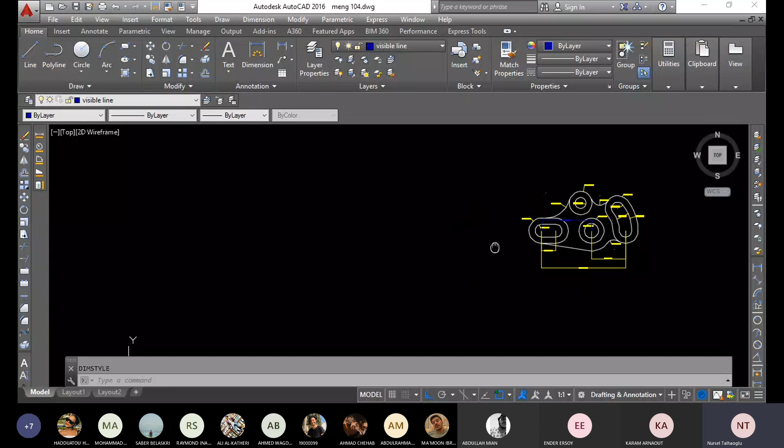So this homework is not graded, right? Not graded. Okay, can you see my screen?

Yes, very good. So first of all, my friends, please choose your command line. Write dimension style, or just DIM style, doesn't matter, and press enter.

Is this program easy for you? Do you have any problem about the program? Do you have any problem, my friends?

Not really. Good. Because after this week, generally we will do lots of examples, and I think you will enjoy these things. We will finish the topics. We have one or two basic topics, and then just exercises up to midterm.

So, did you open the Dimension Style Manager? Just write Dimension Style and press enter in your command line. When you press enter, automatically you will see a table.

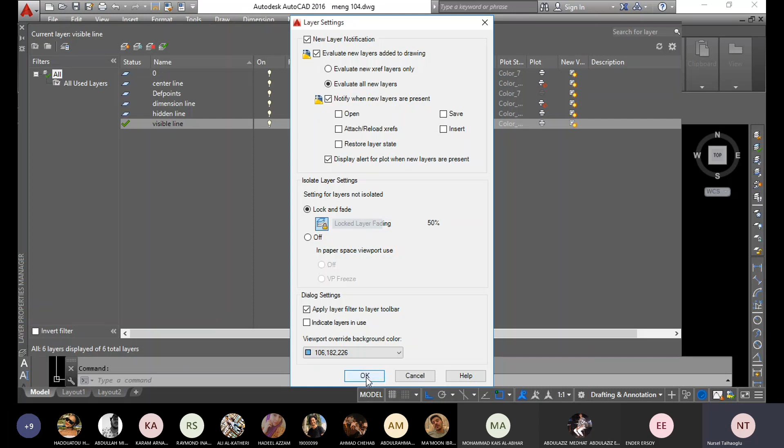This is difficult for you because... Okay, just do these things and press OK. And then please, can you create them again?

Maybe after the lecture, or no? Just a minute. Did you send me the photo? Yeah. Okay, let me check this one also.

Yes, teacher, I sent you the photo. Yes, I saw, just a minute. I will try it, it is related with the other things.

Just a minute. From your dimension style part, you have words: annotative, save, restore, status, variables, and apply. Did you see it? Yes, okay, right, dimension style.

Again, and on this point, okay, please select the apply part. I'm sorry, select what? You said annotative, no. Just a minute, enter the dimension style option, apply part, the last one.

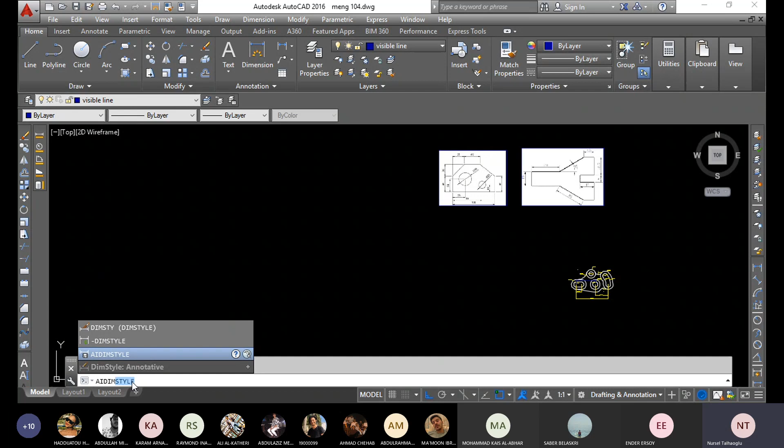Yeah, exactly, yes, I think you select this one, annotative. Yes. This is related, that's why. So just select dimension style and continue. Yes, now you have this window.

Teacher, yes, I have a question. How can you change your dimension units? Because, okay, this your... we will do it together now, okay?

Okay, my friends, can you open this window, all of you? Who opened it? Okay, very good, so let's continue.

First of all, I teach you the options, and our main option is modify, okay? So first of all, start with the lines, okay, with this button.

When you look at the dimension line, okay, you will see in the preview in the upper right corner. Can you see that? Yes, we can see that.

So when you set something, there are setting buttons at the top, okay? So when you set something, you will see the differences in this preview, okay? For example, from the suppresses part, I select dimension line. Okay, can you see the difference? Yes? So you can continue with the preview.

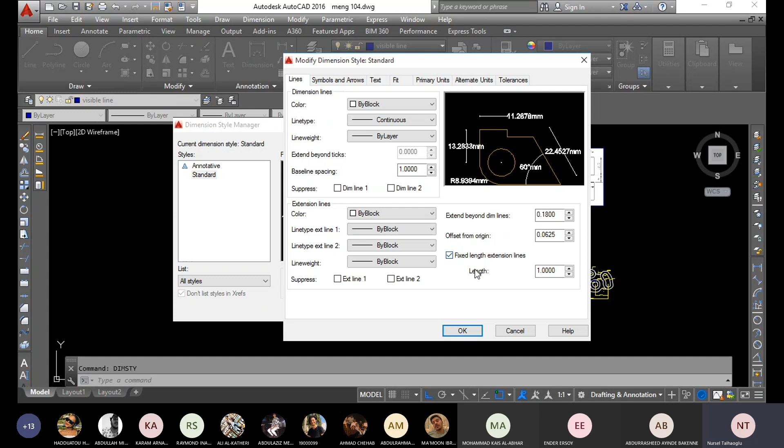Okay, did you finish this part? Fixed length extension lines, okay, can you see that? Oh, this is related with you, but generally I don't want to do this one because when you see them, okay, you can see the corners, okay? It's up to you, okay.

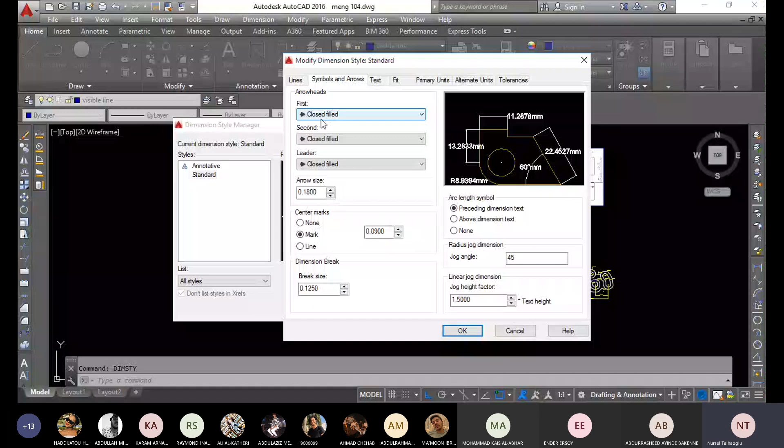Yes. Now, please move to symbols and arrows, okay? For the arrowheads, okay, generally we are using the closed filled arrow types, okay, arrowheads, I mean. So please select all these three, closed filled, okay?

Make your arrow size 5 millimeters, right? Okay, because the other one was too small. We want to see the arrow.

Okay, and for the center marks, select mark. Just a minute, this is really big for this one. Okay, for mine, this was too big, so I change it. Can you see the difference? I will make it 1, okay, please check it from this part. I think yours should be 1 also.

And from the center marks part, please select mark. Can you see the difference? This is related with the center part. Select mark, and the size of the center, 0.05.

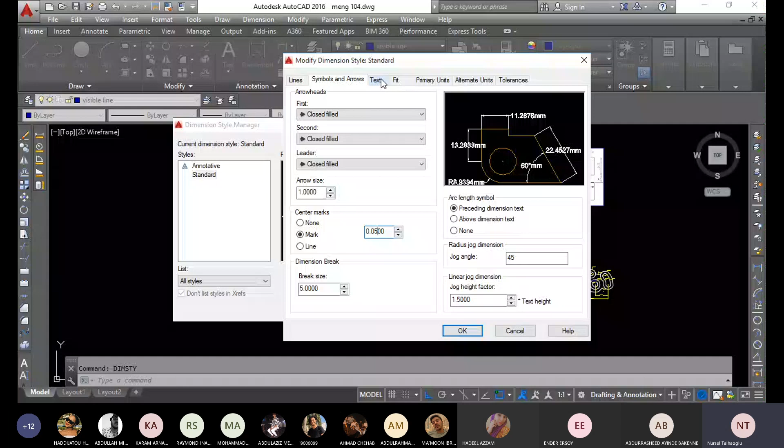Yes, my friends. From the text option, set your text placement, same as my settings, okay? Text style should be standard. Text color by block again. Fill color none, because I don't want to change the background's color.

It means when I select the color, this is your background color. So we don't want to do something like that, okay? So just none.

Okay, let's do the same setting, and this one. I select this one because this is International Organization for Standardization, and the combination of these two options. That's why I set this one.

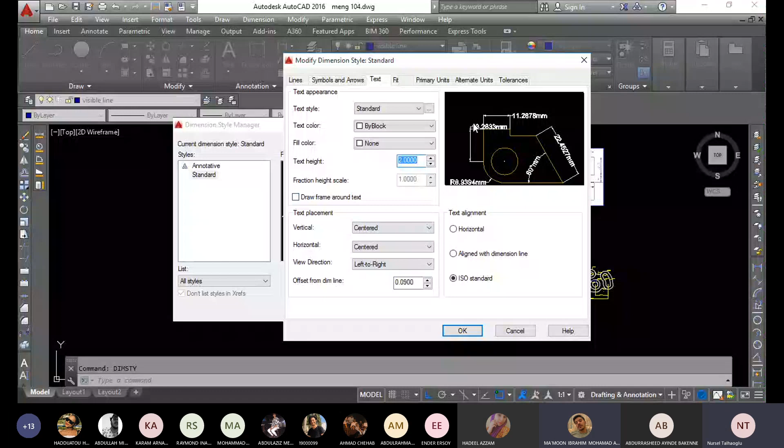Okay, after we finish this part, we will try our settings, okay, then we will check it again, because maybe it is a different preview. Let's wait for the finish. Okay, teacher.

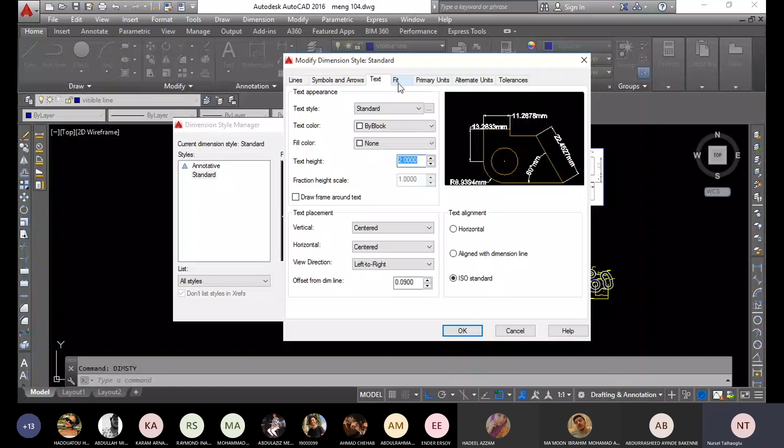Yes, my friends, from move to fit part, please do the same settings. And let me check.

Did you finish? Yes, teacher. Okay, so let me check your text. Yes. Yes.

Very good. Then from primary units, yes my friend, on this point we will add our suffix, okay, which is millimeter. For the unit format, please select decimal. And precision should be 0.00, because if you select the other one, you have lots of zeros, yeah?

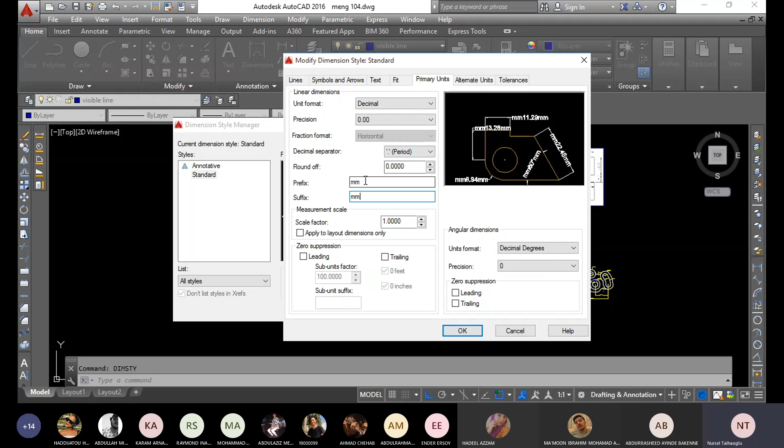And we want to add a unit, which is millimeter, and we have to add this at the end of the size, not beginning of the size. So please, for the suffix part, write two small m's, which means millimeter, and check the difference on your previews, because if you add it to the prefix part, at the beginning of the size, you will see millimeter again, but we don't want this because this is SI units, yeah, just add it for the suffix part. Okay.

When you add it, can you see the difference? Did your settings change? Did you check it from your previews?

Yes hocam, yes. So, yes, do alternate units. No, we don't need these things now. Tolerances, yes. Can you show the fit part again? Fit, yeah, okay, this one.

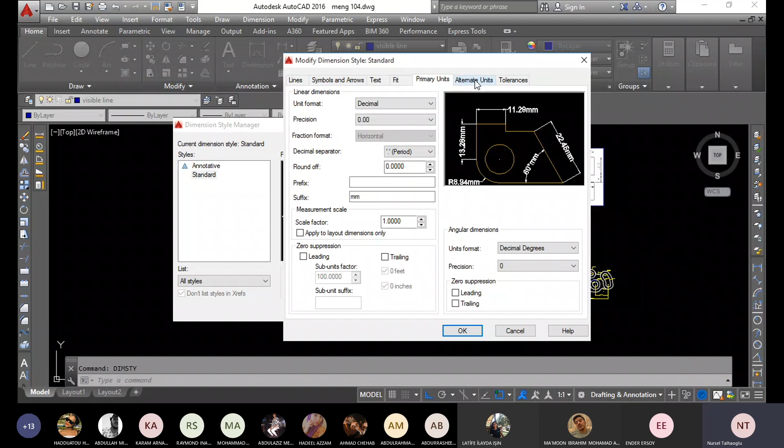Okay, thank you very much. You're welcome. For the primary units, your settings, I said for the alternate units, do not do any settings, it is not necessary. And for the last one, tolerances option, we don't need to set them, okay? These two now.

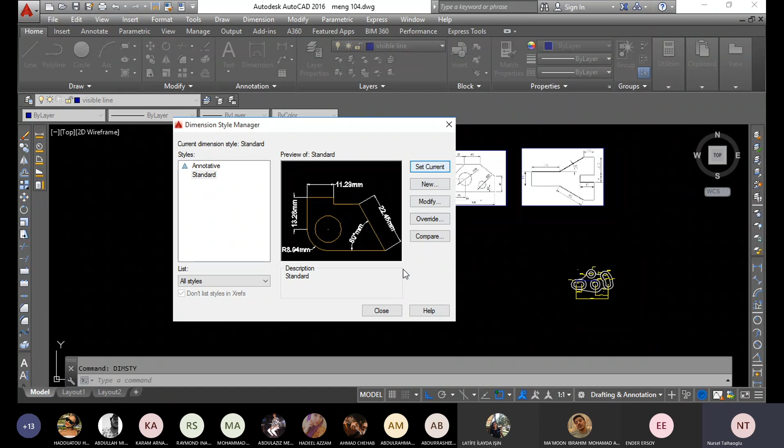Yes, okay, so select okay. On this point, don't forget to set your currents. Select this part, set your currents, and then close your window.

Now draw a small line, okay, with the visible line, and just measure it. The dimension line, of course.

Okay, just a minute. It should be above the line. I had a mistake here. Dimension style. Yeah, just like that.

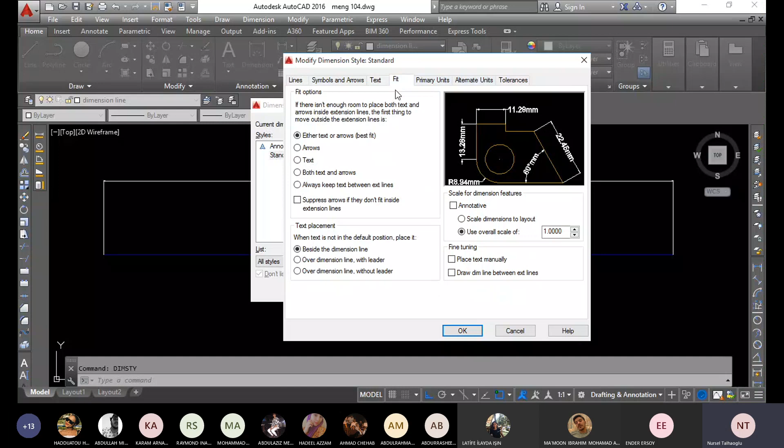I think I remember I select above the line for the text part. Where is it?

Yeah, okay, my friend, please. I didn't aware it. From the modify part, from the text, okay, for the text placement. For the vertical part, just select your text placement above. For the horizontal also, center. And view directions should be left to right.

Let me check for the vertical one. Yeah, it's okay. Okay.

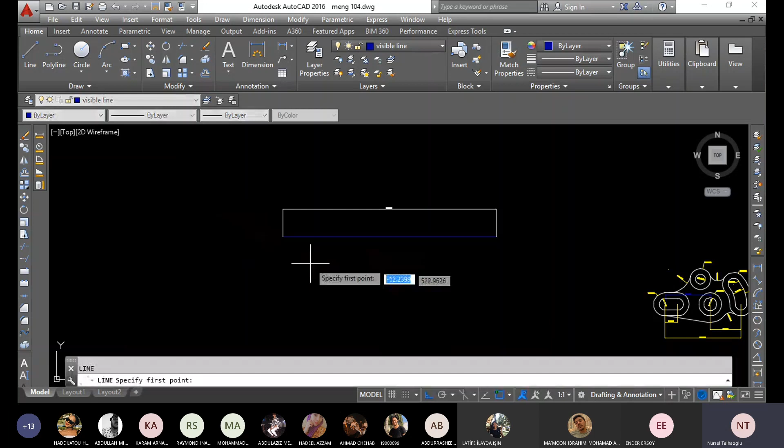Yes, my friends, are you with me? Did you set your layers? I mean dimensions? Yes hocam. Very good. So let's draw this example, okay? Start with this first one.

Can you draw this? I think you can. Draw the first example, please.

What is this voice? What are you doing?

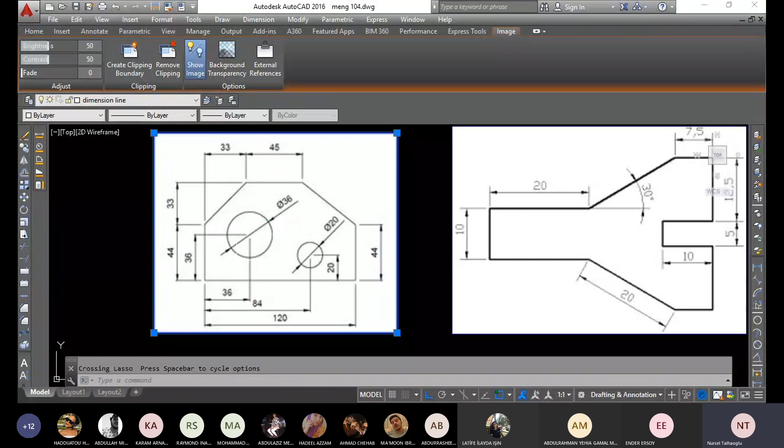And for the dimensioning, you have to use the dimension line. For the center, this one and this one, you have to use the center line, yeah? Are you okay? So what we have is a 120 line, baseline, yeah?

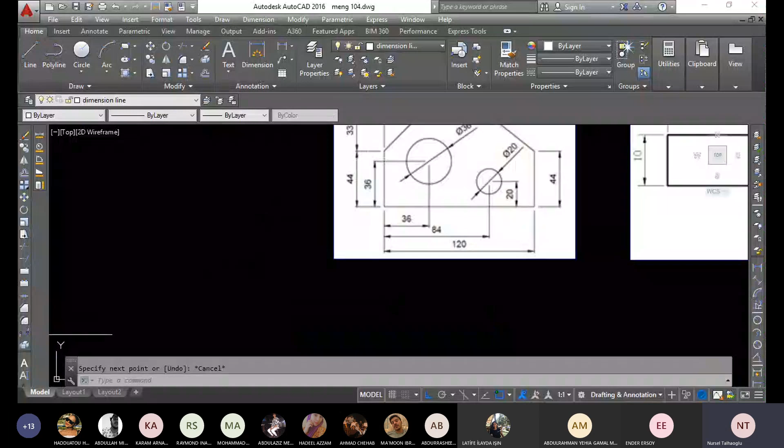120 millimeter line, and after that I have two vertical lines, which is 44 millimeter. I'm sorry, I have to do that with the visible line. First of all, draw 120, okay?

And then 44 from the beginning and 44 from the end. Yes. Is it clear? Let's measure it with the dimension line, step by step. You see? Okay, and after that,

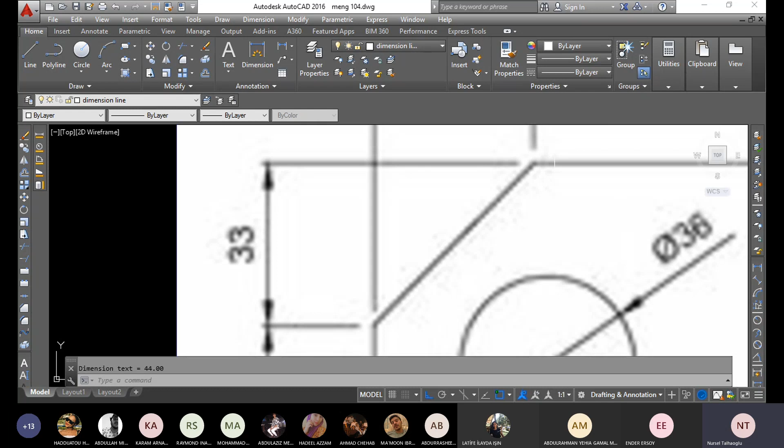from this circle center, okay, you have a line here. Yes? This is on the same point, yeah, on the same part. And what we have is

a 36 diameter millimeter circle. Yes, so first of all you have to find your center point. Okay, so maybe you can use layers or lines from your vertical and horizontal lines. The first one, 36 millimeter.

Move this one, 36. And the other one from this point is again from the beginning to 36 millimeter, right? So let's move this one 36 again. So this point is your center point now, yeah?

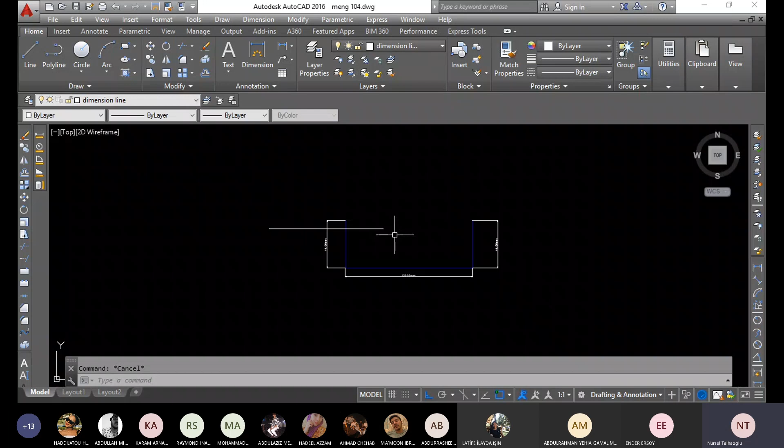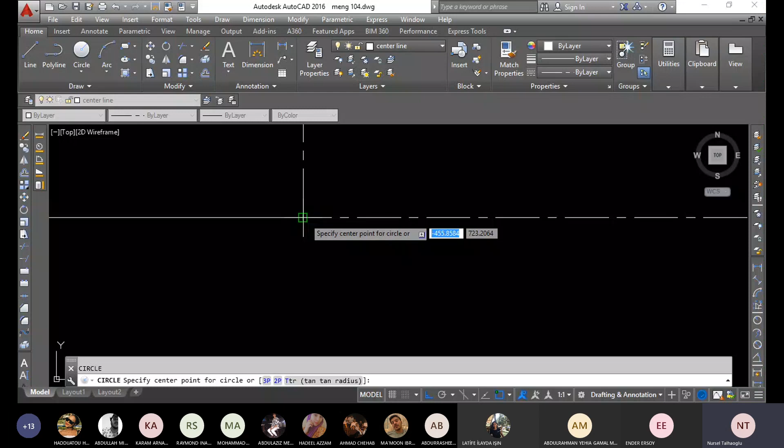What we need for the circle, we need the center lines, yeah? So just select center line here from your layers. Line. Okay. And select type C or okay, and from your point, with this visible line again, draw a circle

with the diameter 36. So its radius, mine is 18, yeah? And this one, make it long. Am I fast?

Miss, why do we have to use center line? Because you have to show us the center point, okay? The intersecting point of these two lines is your origin, I mean your center line, that's why, okay?

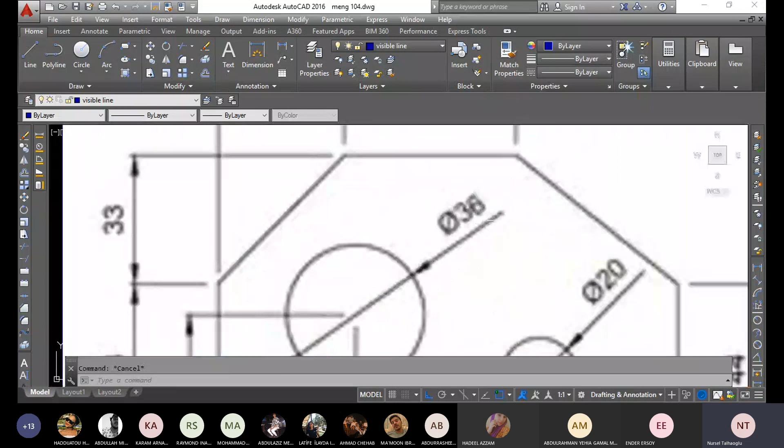Okay, can you repeat the dimensions that you chose? This one, dimensions. Your dimension is 36 here, okay? So, and the diameter is 36. So half of it is your radius.

So when you create your intersecting point, your origin, just type C to your origin, okay, and write 18, okay, half of it. And press enter. Automatically you have your circle and you can measure it.

Teacher, can you do the layers with us? Because I didn't do it. You need to do it with the layers. Yeah.

You mean you want to create these things again? Yeah, because I downloaded the AutoCAD from today. Okay, but first of all I want to finish this one. Let me finish this one for your friends, okay? And then maybe you can see the record, huh?

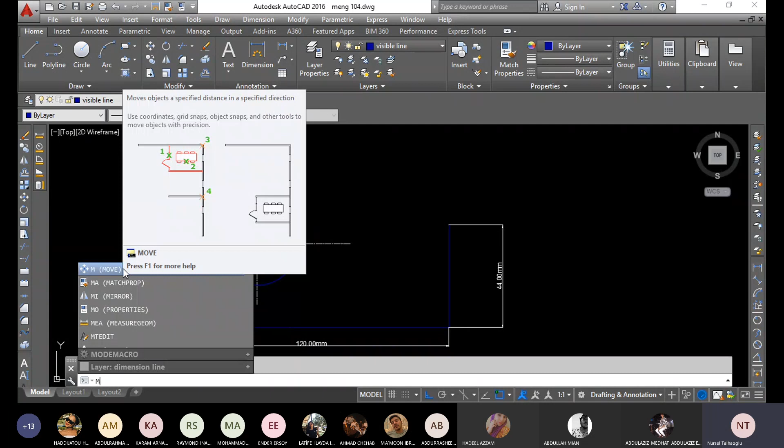Teacher, okay, yes, teacher, how do you move lines? You can move lines, my friend. Just type M, okay, and select move part. Okay, then select your object and move it. But before you're moving, just select right click.

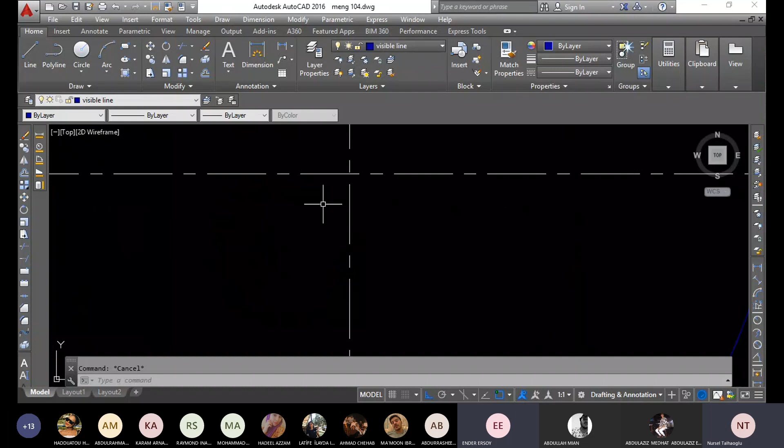Miss, can I ask you a question too? Of course. For example, if we make a plus with two lines, and we want to cut one part of the plus, like the top side, for example, what are we supposed to do? Which command was that? I forgot that.

You can keep it like that, or if you want, you can make it short. It's up to you. We want only to see the center lines, I mean, I want to see your origin point. So you can make it small or you can make it long, it's up to you. But you should pass the center line, to see, for example, in the homework.

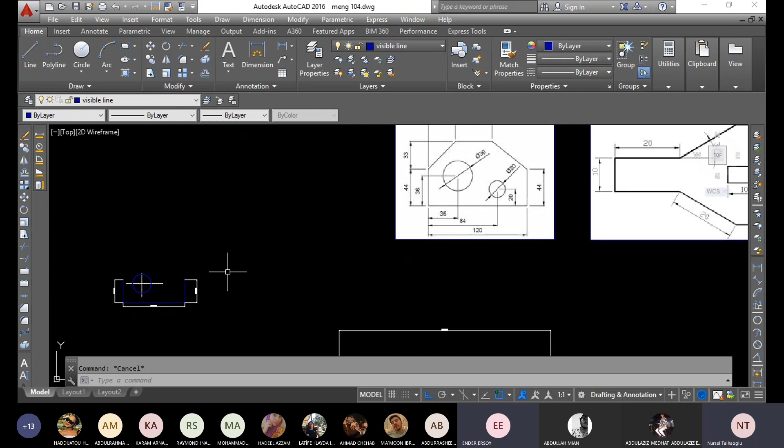As you remember, there is a part where there is a circle, and on the circle there is a half circle. For the half circle also you can keep it like that. For example, I create two circles for it, and for the larger circle I try to cut it on half, but I can't, so I make the second circle with arc. Did you use the trim command?

No, what's that? Okay, so with the trim command, maybe you can do something like that. With the trim command, my friends, you can cut the small parts. Let me try. First of all, I want to cut this one. For example, you mean you have a

half of this circle, yeah? You want to cut this line, yeah? Can you repeat that again, please? Like, how did you do that? How can I cut this part? You should use the trim command. With the trim command, you can cut the parts that you don't want.

So first of all, apply this command. Type TR, okay, trim, and press enter, and select your border. This is an important point: first you have to select your border, your limit, okay? So this is my border, for this missing part. Select your border, then right click, then select your object that you don't want. Automatically when you move your mouse on the line that you don't want, you can see it disappears, yeah?

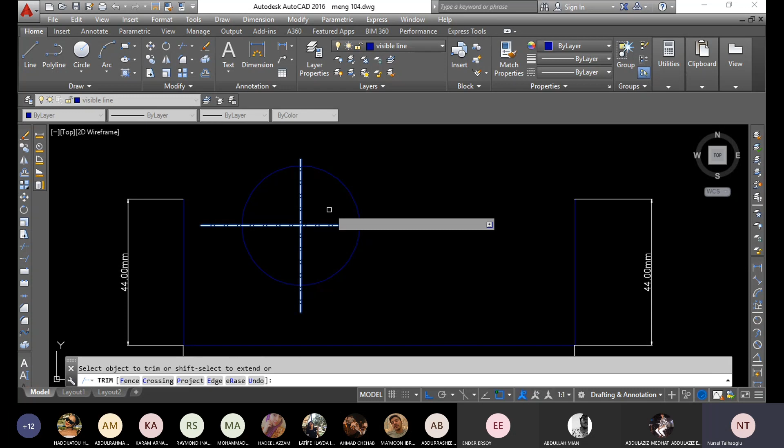So can we choose two borders? Yeah, like if you want a quarter of that? Yes, you mean something like that. I type TR, press enter. This is my first border and this is my second border. Then right click, and the part that you don't want disappears. Thank you very much. So this is a very useful command, but don't forget to right click.

So let's continue. After this circle, my friends, you have again a circle with the interval not 100, 84 millimeters. So from this point, you have to draw a line.

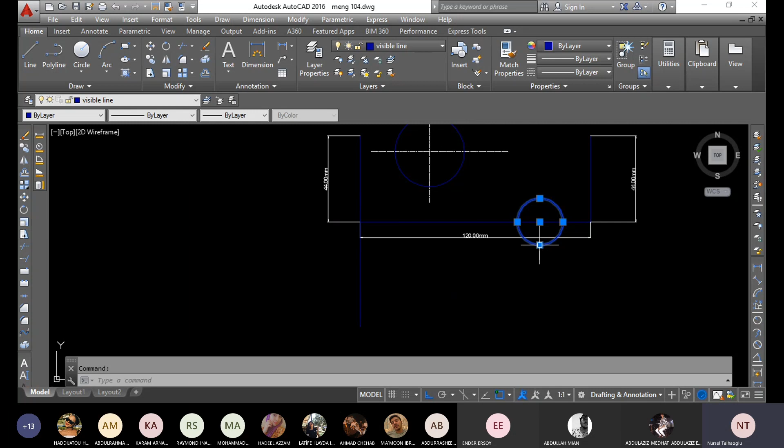So the layout, my friends, just move, this is my way, you can choose another way. Maybe you can draw a circle from this point and you can move the circle, it's up to you. Maybe you can move it, and move it again for the original point, or you can continue it this way. It's up to you.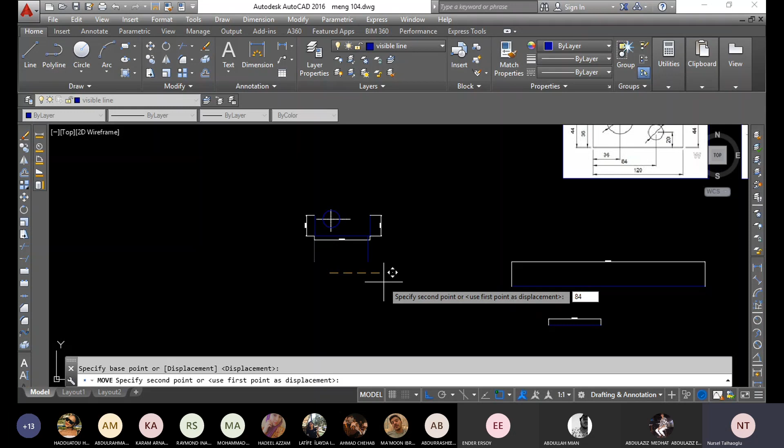Just make it long, 120. Sorry. Okay, I want to move it. And from this point, from the baseline to your center point, you have a 20 millimeter interval, yeah? So copy this one, or offset this one, doesn't matter, same thing. At 20. Okay, so now you have your intersection lines.

Then draw another circle with the radius 10, because your diameter is 20. Just by 10, press enter. Okay, now you have your circle. Is it okay? And don't forget, these two lines should be center lines.

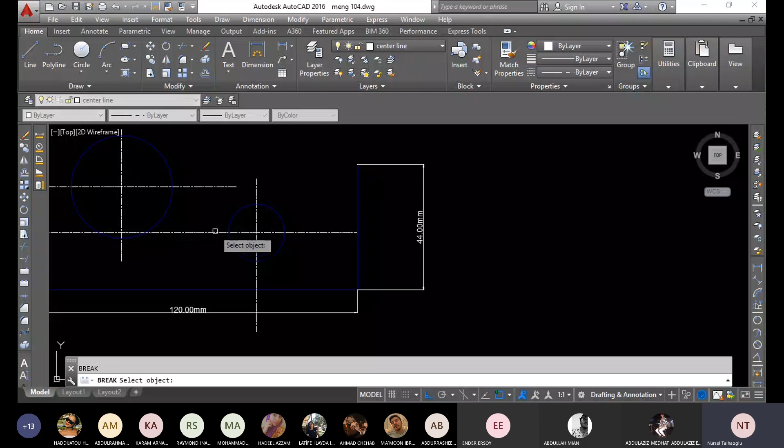One more comment, my friends. If we want to get these lines' properties onto another line, just write MA, match properties. It is here with the word, yeah? Just type MA, press enter, select your object that you want properties from, and select your other line, another line. Is it okay? Is it clear?

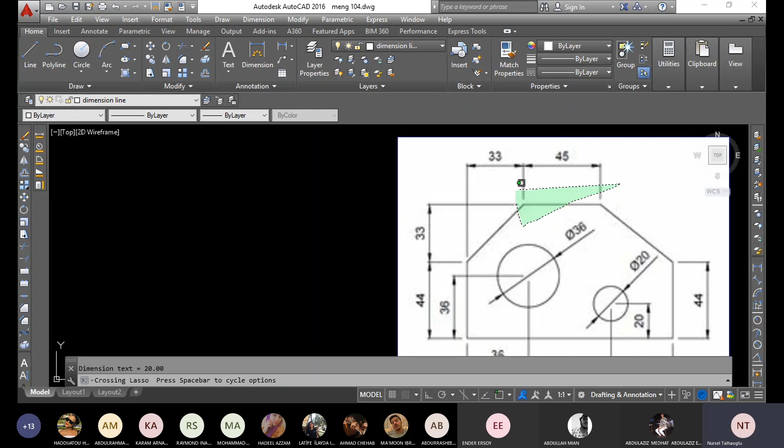The dimension line, yes, give your measure. Is it clear up to this point, my friends? Yes, miss. Yes, ma'am. Yes hocam. Very good. So another thing, we have a 45 millimeter line here, yes? So it is starting from this part. Let me check one thing.

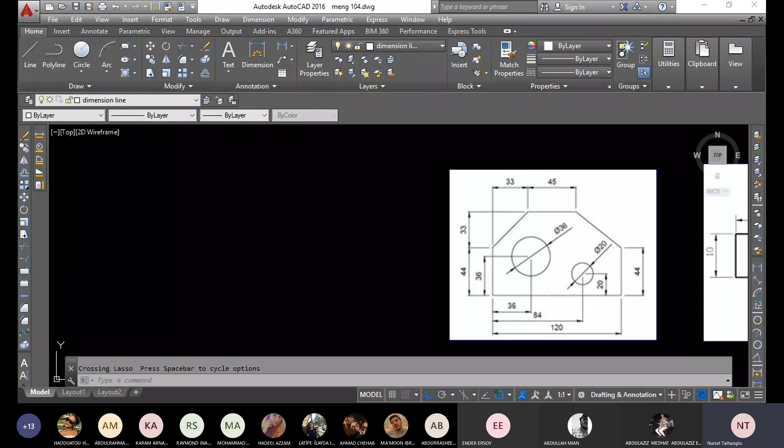What is the interval between the upper line? For this line, you have a 77 millimeter line, yes? So please copy this one, CO, from the beginning point to the up, 77 millimeter. Is it clear?

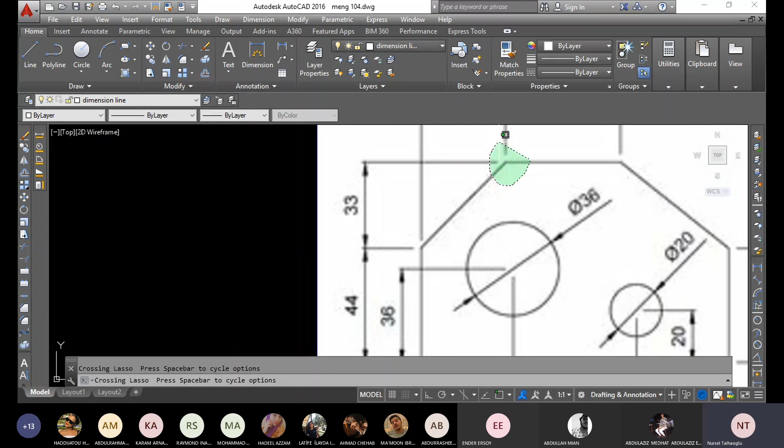What we have here, we know this center point and this point are on the same border. It's not absolutely shown like that, but it is like that. So first of all, draw a line from here. But my friends, don't forget, you have lots of ways you can use another way. It is related with your drawings.

I draw a line, so I want to copy this line from here to right, which is 45 millimeter. And I want to cut other lines because I need this one. So just select type TR. I select this one, I select this one, and right click. I don't want this part and this part. Then you can erase your layout words.

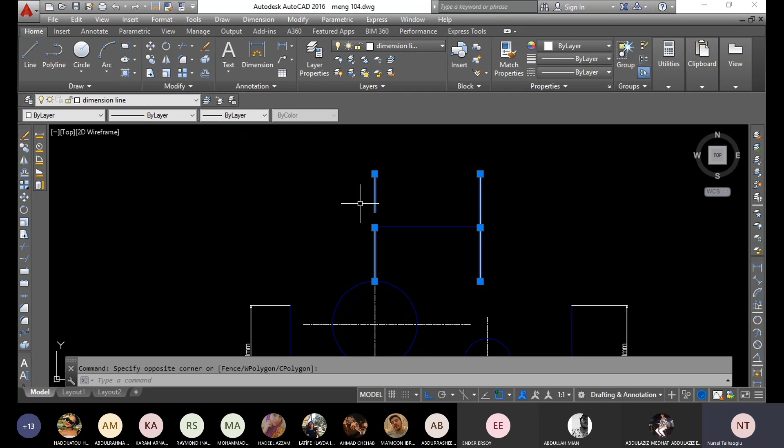The only thing we have, just draw two lines from here to here. But with the visible line, don't forget. Here to here, and here to here. That's all. Can you see?

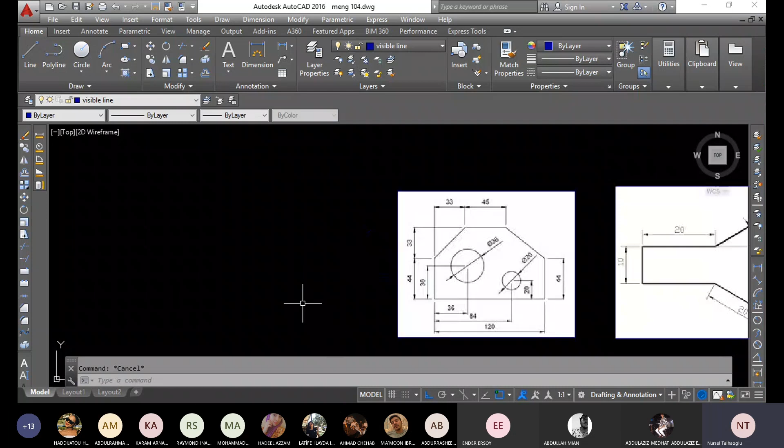Is it clear? So if you measure it with the dimension line again, you will see this is 45. This is 36, because it means this is not absolutely on the point. It is related with the drawing. Don't worry, this is not too important. And this part is 39, 80, 39. That's all, my friends. Is it difficult? I think no, but I don't know your idea.

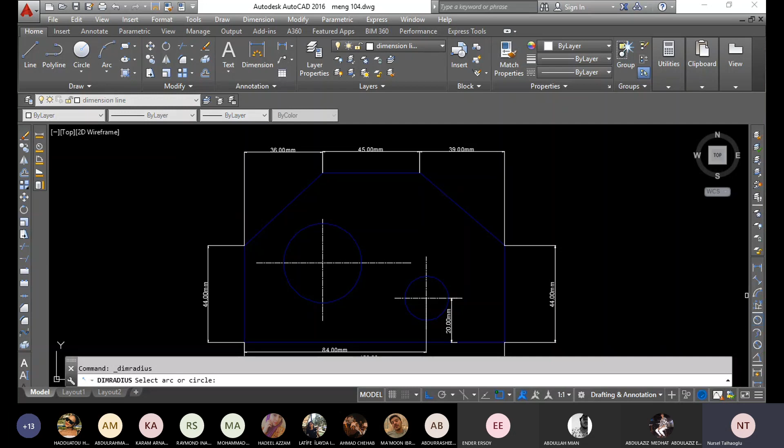Let's measure other things. How about your settings, my friends? My dimension setting seems okay, but I don't know yours. It seems like mine.

Did you finish? Yes, very good, all of you, my friends. I think it's not difficult. No, easy. Yes, very good.

So please draw this one. Who finished first will get 2 points from me. Okay? Can you do that?

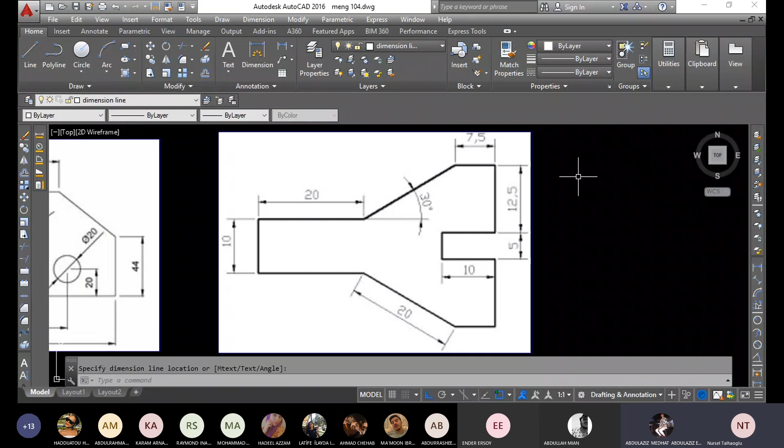Well, it was homework. Okay, but I want to draw now. This was your homework for this group. No, it's not like that. Just a minute, I will give another one, because I mixed the groups. Let me find it.

Okay, these are. Maybe this one. Okay, I will give a difficult one, huh?

Teacher, yes. Teacher, but for dim style, you gave us the setting, right? Yes. When I close it and I'm drawing for my dimensions, the arrows are gone and the numbers are really small. Okay, because I think you didn't set your current before you close your window, yeah?

Okay, wait, literally, just a minute. Text height, so dimension style, define text height. Mine is 2, yours? How about yours?

Teacher, it went back to the previous one, like the previous setting. Selected and then it should remain the same when we close it. When we close this and start making the drawing, it goes back to the previous one. Yeah, just select O, press OK, and set your current. I did the same, but I don't know what's the problem with this.

Okay, so let's do it again. Your from text part, make it 2. But I think if it is 2, you really need to change it. What is your text height? Mine is 2 and it's really small.

Okay, so you can make it 10, my friend. And please see the preview, don't forget, make it 10. Because for me, this 2 is enough for me.

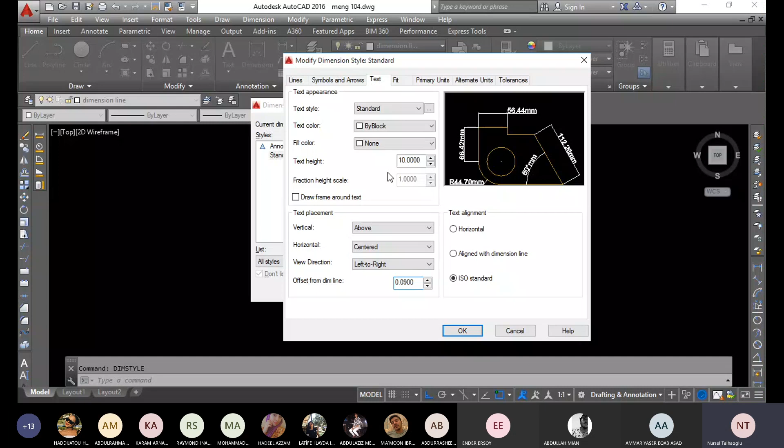And for the 1 over 50 scales, we will move to scales, this is a different topic. For the 1 over 50 scale, 10 font size is okay, it is readable, so make it 10. Maybe your plot settings is different. Make it 10 and press OK, and set your current, don't forget. Then close. Okay? So is it okay now?

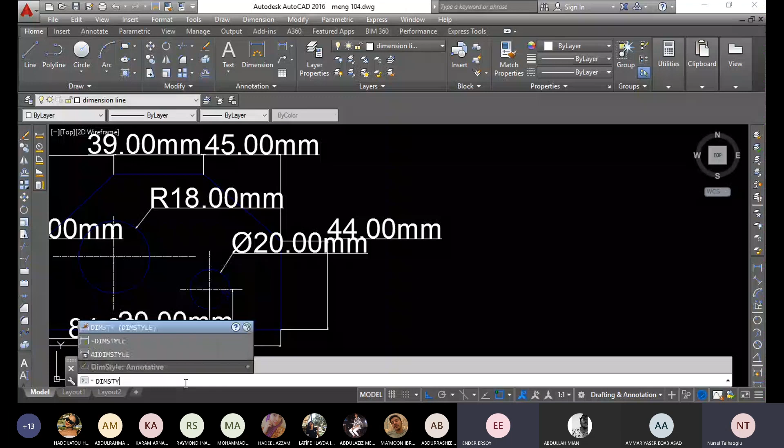Miss? I think the problem is if when we are working with millimeters, 2 is okay, but if it's bigger, we need to do in centimeters, isn't it? Yeah, it's okay, we can use it also. But for the international drawings, we need to draw them with the millimeters, this is better for us. Because we have very small parts, so we don't want to do our job with the 0.0s, that's why we are using the millimeters.

Okay, when you change your text height, is it okay now? Yours. Yes, it's okay now. Okay, so use 10 for your drawing, because I have to use it too.

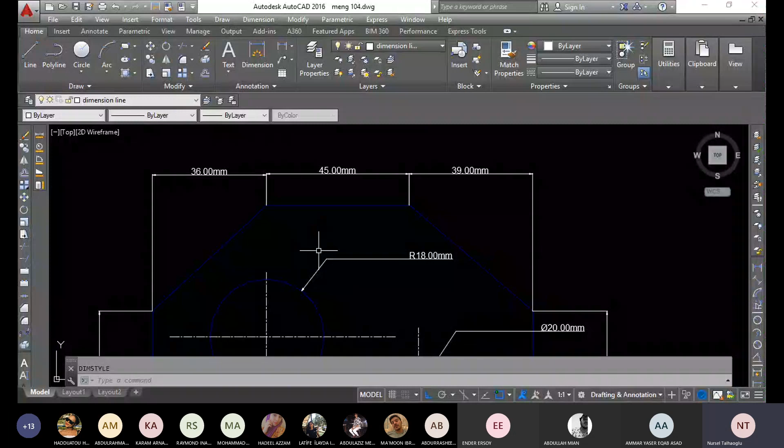Okay, we will apply lots of settings. End of the lecture, you will see we will have the same settings on our screens. Don't forget, don't worry about this. Okay, let me share my screen, what we have.

Let me find an exercise for you, a difficult one. Yes, I found it. Okay, let's do this one.

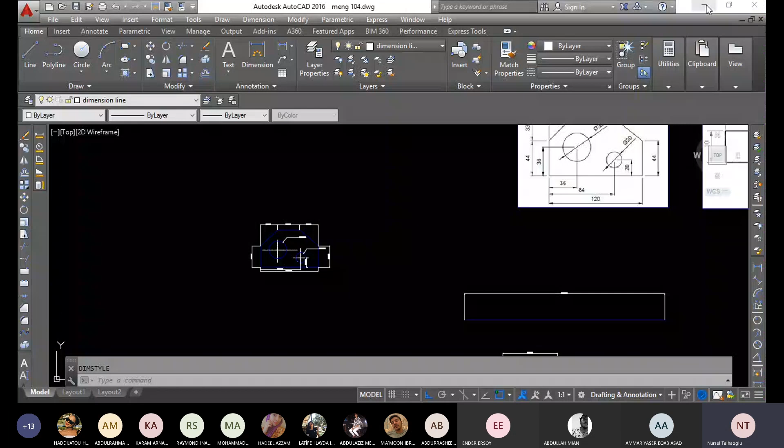Can you see it? All millimeters in, all dimensions are in millimeters also. Okay, who finished first and sent it to me gets extra 2 marks from me. And then we can draw it together.

Okay, miss. Okay, I am waiting. Miss, can you share it with us, like the image? Okay, maybe I can send it to you from our chat. Oh, it can be perfect. Yes, of course, just a minute.

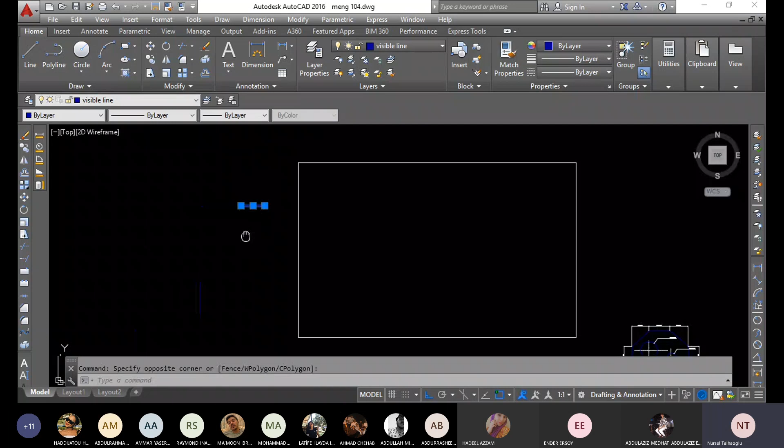I want it from here, okay? A true line, okay? I accept you draw all these lines, I mean other lines, these things. And you have only this part. This is the easy way.

Just write fillet, type F, type R, and specify your radius, which is 20. After this part, if you select your objects, automatically you have a curve. This is very easy.

Is it okay? Ma'am, yes. Teacher, once again please, did you see mine? Did you check it? Yeah, let me check. But the last one. Okay.

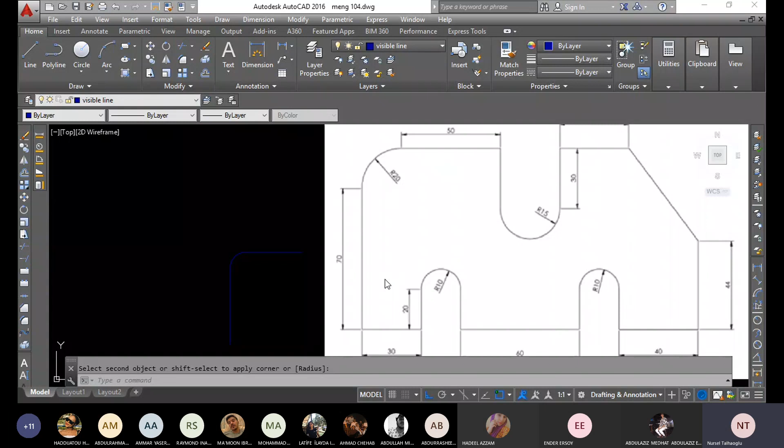Yes, but you didn't use the dimension line for the dimensioning. Again, you use visible line.

In the second one, I changed that, but as I told you, mine are deleted, so I just quickly write something like visible line and hidden line. Okay, in your exams, this is okay.

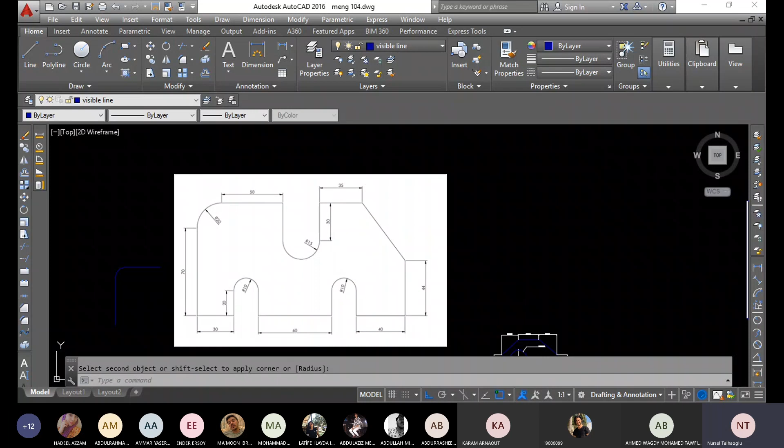Okay, did you understand this part? This curve? You can what?

So can you explain the curve again? Sorry, the curve you just explained. Can you do it one more time, please? Yes, of course, and I can show you one more way also.

So only type F, which means fillet, press enter, and R, which means radius, fillet radius, and give your radius, which is 20. After you do your selection, just select your two lines. Automatically you have your curve.

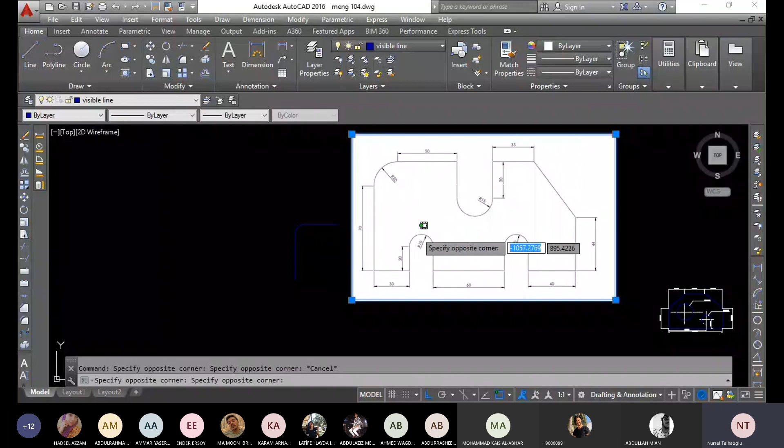Okay teacher, what about the big curve, the half circle? Which one, this one? Yes. Okay, we are talking about this one. So Miss, can you show that again please?

Which one, this one? Yeah, this one, because I make a circle and I use trim and cut the other three parts. Okay, this is the way also, but this is the easy way, huh?

Okay, take that way. Just press F, type F, which means fillet. Press enter, then write R. Press enter. And now you can specify your fillet radius, ours is radius and 20, press enter. Fillet, enter, radius, enter, and then your radius size, enter.

Specify your radius, and then just select your objects.

Okay, thank you. Sorry, Ma'am, just have a question. When you measure it, yeah, of course, you will see this is 20. This is very easy way.

Yes, of course you can. I sent you the drawings I drew, but I don't have the layers as well, so next time I will accept with the layers, okay? Okay, so let me take my mouse.

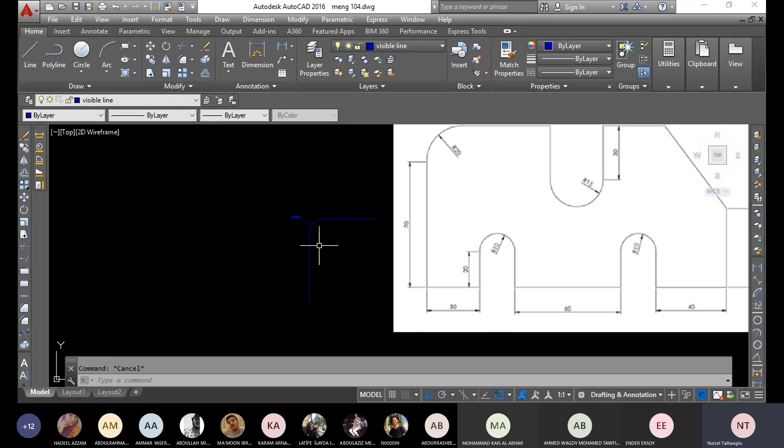Your friends asked about this middle circle, okay, how we can do the trim. So we have two lines, yeah?

Which is 30 millimeter, and copy it, 30 millimeter with the interval. Is it clear up to this point? Because if your radius is 15, your diameter is 30, yeah?

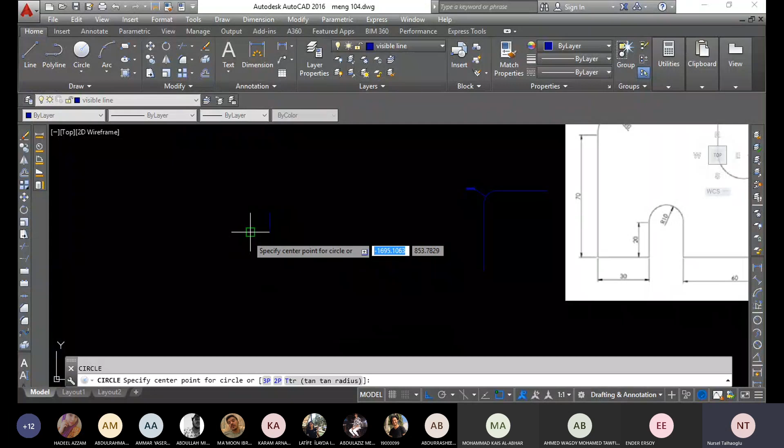From this point, if I draw a circle from this point with the radius 15, it is okay, huh? Sorry, with the radius. Yes, and if I move it 15, it should be okay, yeah? I think this is an easy one.

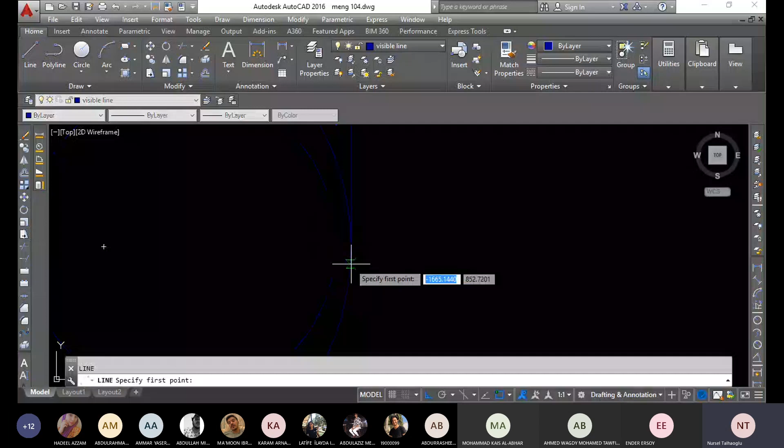For this part, I have to cut it from this part, yeah? So you can draw the line, but it is not necessary. You can do it like that, but some of your friends maybe prefer this way.

First of all, you need borders to apply the trim command, so you have to find an intersection point. So type TR, okay, and select your borders.

I want to cut this part, yeah? So these two lines are my borders. So select them and right click, then select the part that you don't want. And you will see you don't have any missing part, you cut the part that you don't want.

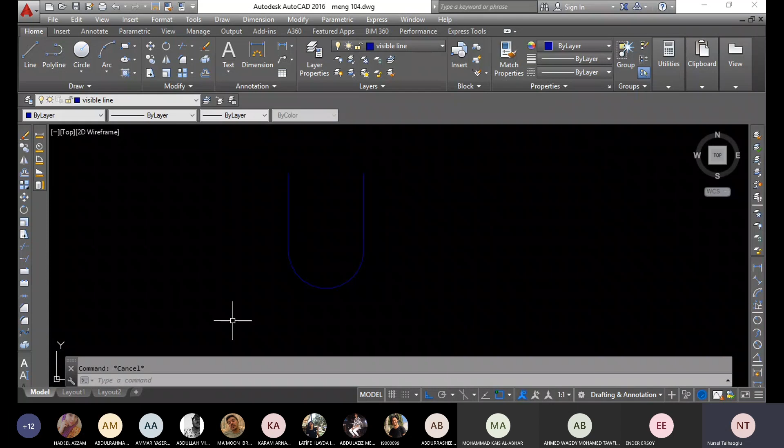Is it clear? Yes. Okay, so if you couldn't apply this one, from this intersection point, draw a line and type TR, this is my border, selection, right click, and select your part. Then erase this one. This is also a way, okay?

Teacher, for the previous one, you wrote fillet and then radius. Yes. Fillet, radius. You can keep it from here also. Radius, doesn't matter. And then your size, your radius.

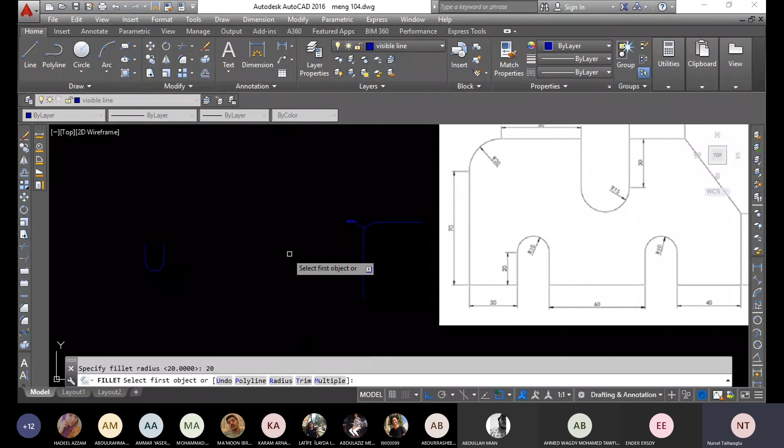Okay teacher, thank you. You're welcome. Abdul Rashid, thank you very much. But you are the fourth person, okay? I said first three persons, okay? Maybe next time. But this is good.

But teacher, again you didn't use the visible line, okay? Teacher, I have an issue. My lines, I can't use like 20 millimeter because it will be too big. So I have to minimize it to draw, and the dimension writing won't show. Okay, you can send it to me.

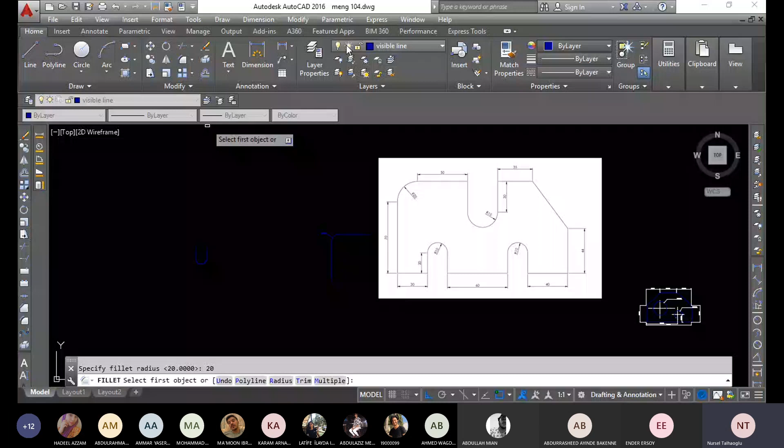Your settings photo. Okay, I want to see your settings. Then yes, my friends, you want to see my layer properties? Yeah. Check it, please.

Teacher? Yes. After you make the circle, you put the dimension sign between that, right? Yes, this one. For this one, how would you put on the half circle the dimension line? How would you choose it? You can use the dimensioning part for the half circles, doesn't matter, okay? Because you have a center point, so you can measure them. Just select your radius from the dimension part. Okay, just select your line, your curve.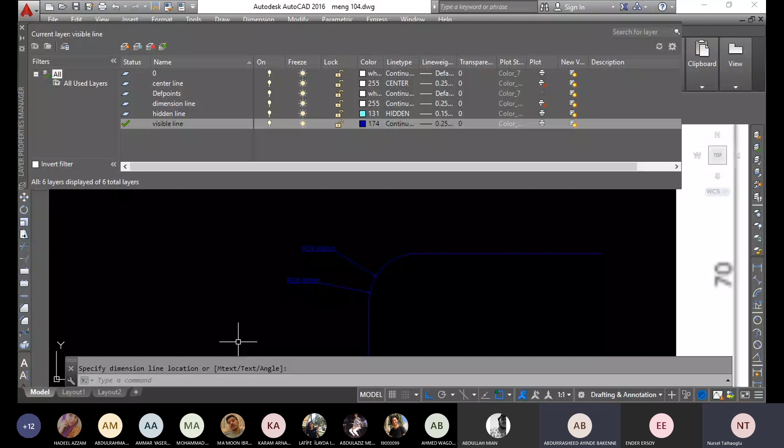Okay teacher, thank you. Okay, diameter. Okay, you can measure it.

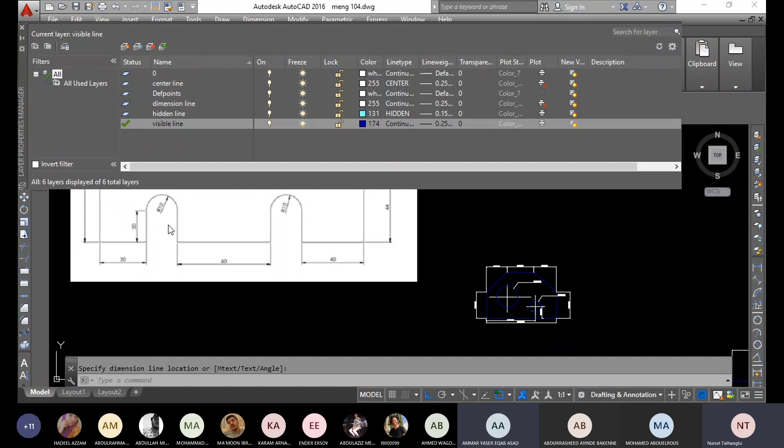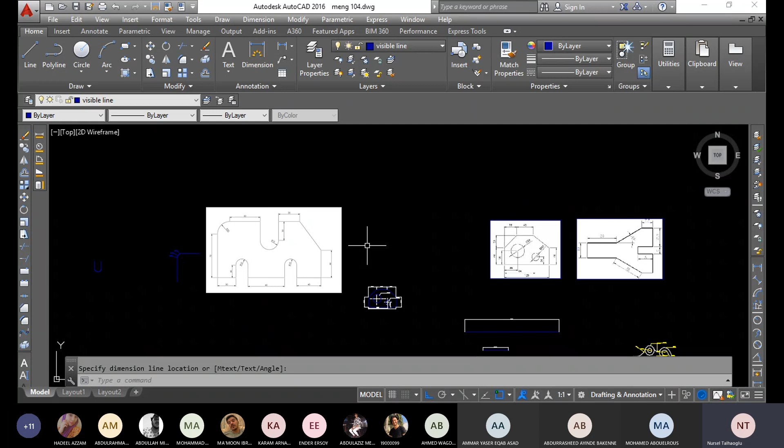At the beginning of the lecture I explained them. For example, you want to draw an object. I will close it just a minute. I think it's enough, you can see from the records also. For example, you will draw an object, okay? And you should know your main parts, okay? For example, for this shape, for this drawing, this is my main drawing, yeah?

So your main drawing in these circles should be with the visible line, okay? Because with the visible line you are showing the main object. But if you have a circle with the visible line, you have to put your center line. So, to see the origins, to see the intersection points, okay, you have to put the center lines. It means when you have a circle inside it, you have to put center line. Okay, so these two lines are center lines.

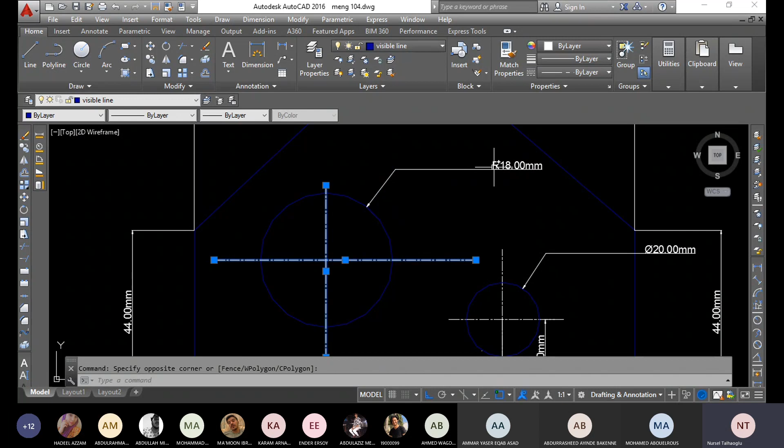And if you want to give your sizes to your drawings, to your objects, you have to put dimension line. That's why we create dimension line, hidden line, visible line, center line, okay? Miss? Miss? Yes teacher, understood. Good. Thank you so much.

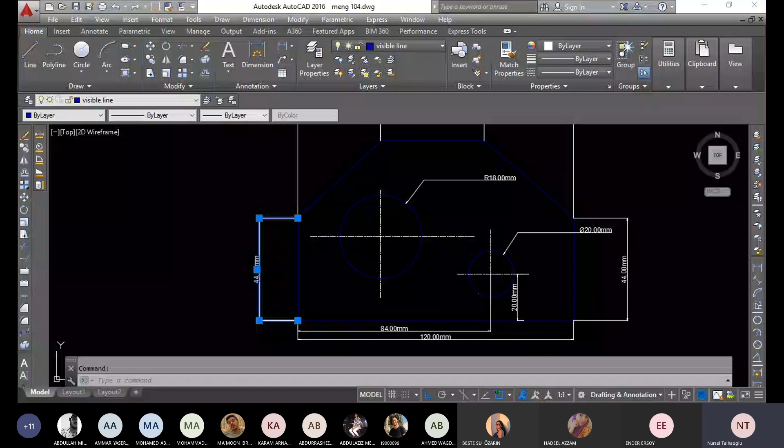Okay, and this time I will show you angle, how we can give a specific angle. You have two lines, okay, and you want to give a specific angle between these two lines, yeah? First of all, are you with me? Yes, ma'am.

First of all, you have to select your line that you want to rotate. So select your line and type RO. Select your object, doesn't matter, and then right click, and then specify a base point, and this is important. I want to do the rotation from this point, so I have to select this point, my friends, not that one.

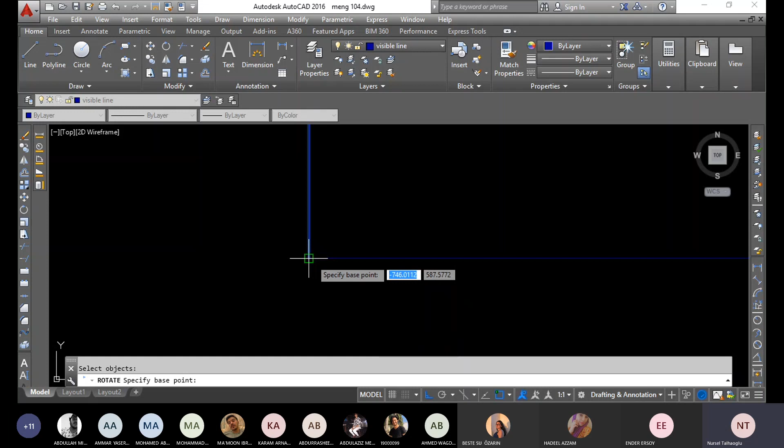Select your base point and move your mouse. If you press F8, you can see the rotation easily, I mean your ortho mode should be off. If your ortho mode is on, maybe you can see it only vertically and horizontally, but if it is off, you can see it directly. Are you with me up to this point?

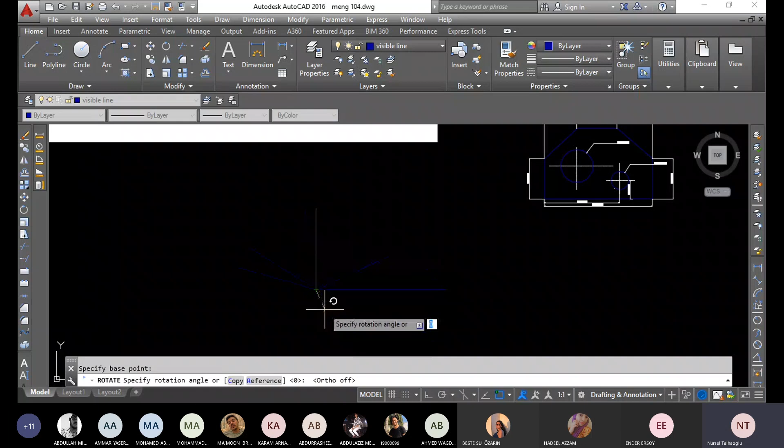Yes. From this point only, give your angle. Maybe if you want to rotate your angle this way, change your position, okay? And for example, I need a 30-degree rotation on this point. It should be maybe 30, but I know this is perpendicular to each other, so it is 90.

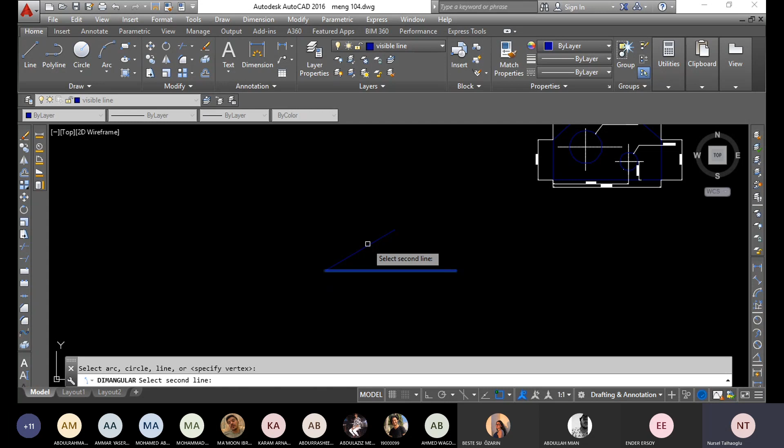So I need to make it 90 minus 30, so it is 60. So your rotation angle should be minus 60, sorry. Minus 60, okay? Just press enter. When you measure it from the angular part, you will see this is 30. Why minus? Because your position, it is up to down, yeah?

Miss? Yes. Or the tutorial teacher said that we can do that with tab. Like for example, we draw a line and we say 30 millimeter, and then we draw another line, and we write, for example, 20, and we press tab, and we pass the angle.

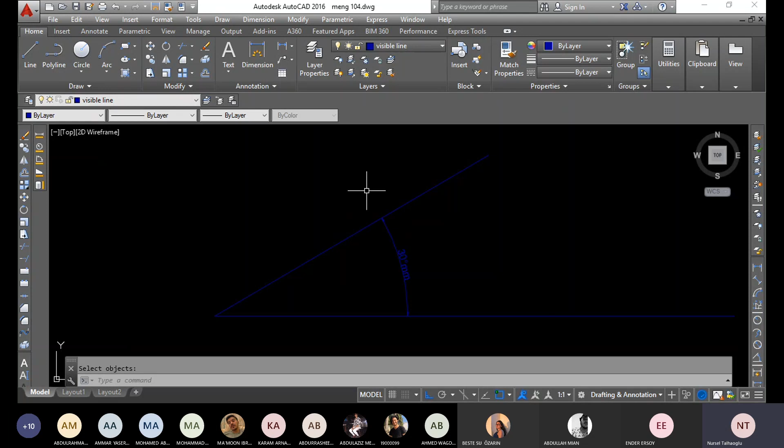Okay, this is another way. You can use both, we have lots of ways, okay? So don't worry about the ways. This is also usable, this is up to you. I am using this way, maybe this is easy for me, maybe the other way is easy for you, okay?

Yes, my friend, another thing. Did you send me a photo, my friend? Okay, you didn't send my dimension settings. Yeah, my friend, first of all, you should add for the suffix part double m, I mean millimeter, okay.

Just a minute, let me share mine. It is related with your settings again. First of all, from the modify part, my friends, your text placement, from the text, should be vertical one above, horizontal center, okay, and left to right. Are you with me? And international standard, organization standard.

Are you with me? Yes. Okay. And for the primary unit, you should add millimeter for the suffix part. Yes, okay. And your unit format decimal. Yes. Okay, and I saw these things on your photo.

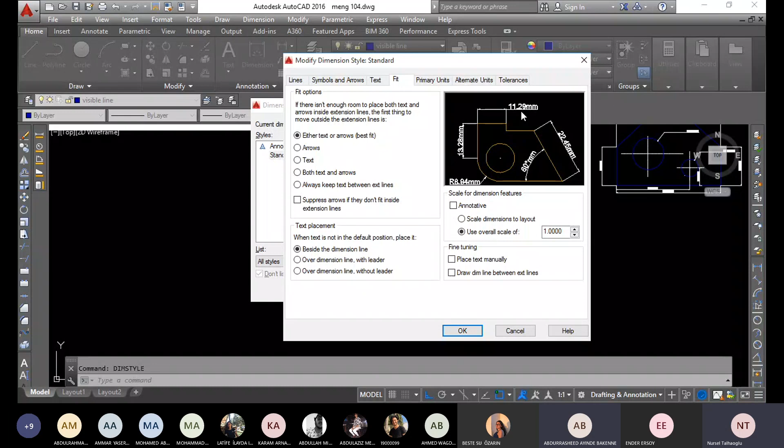Which part? Text, Fit? No, the right diagram on your screen. Yes, the numbers are written in 2 decimal, 22.11 point, but mine is 1.1 something. If I draw 20 millimeter, the line will be too long for the page.

Okay, so you should change your unit format as decimal and precision. Yeah, decimal is my unit format, and precision is 0.0. Okay, can you share your screen? Can I share mine? Yes, you can share. Okay.

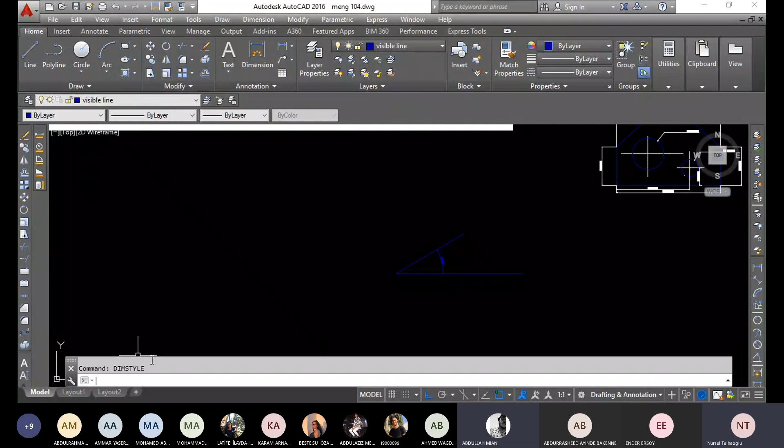This is the difficult thing for the online format, my friends. Teacher? What? Teacher, can you show your symbols and arrow again? In the dim style setting, can you show your symbol and arrow, the setting for symbols and arrow? Yes, of course, but if I... Okay, mine will close because your friend will share, but... Okay.

After Rashid, okay, after Rashid, maybe I will finish the lecture after a few minutes, okay? Then we can join together, huh? Okay.

Your precision is 0.0000. Only use 0.00, that's enough, okay? Okay, and then it will be okay. Another thing.

Is it okay, my friends? No, it's still the same.